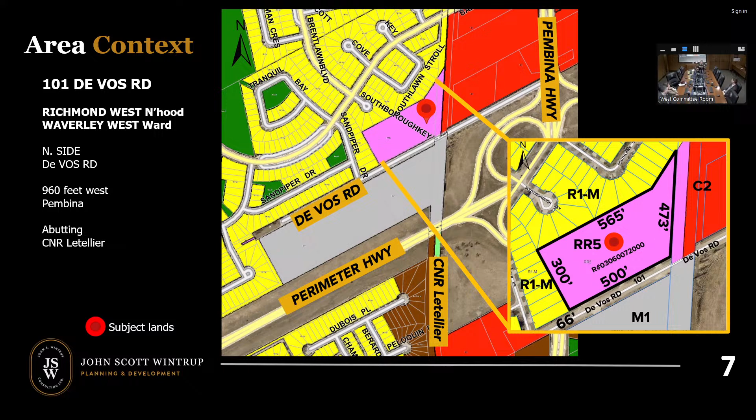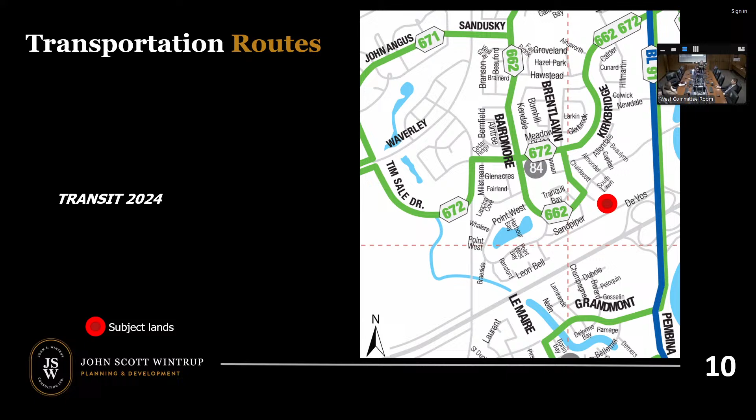Currently, DeVos is a 66-foot wide P3 rural standard with ditch drainage. It's a dead end at the west end, with a turnaround there. There's no other connections to any other residential roads or streets. So it's essentially a long cul-de-sac.

To the west of us are residential properties with R1 zoning. They have no access to DeVos Road across that ditch there. All their houses back onto this road.

Currently, 101 DeVos Road is a two-story structure. There were some hopper containers recently removed off the site for preparing for the upcoming redevelopment of the property. As I mentioned, it's RR5, but it's being changed tentatively to the industrial zoning district. It's a 4.2 acre site bounded by DeVos on the south, residential dwellings to the west and to the north, and the CN Letellier line to the east of us.

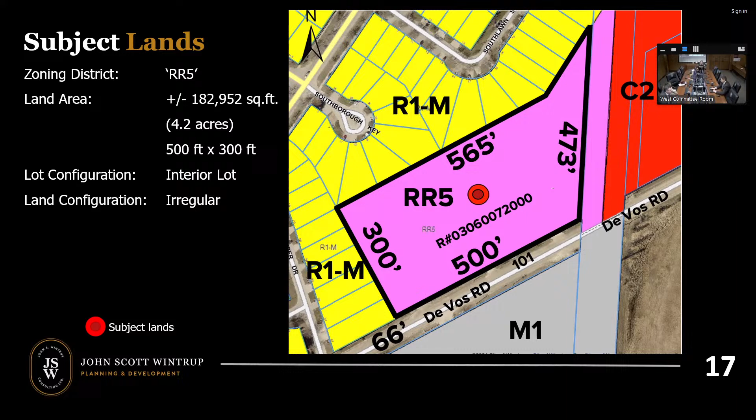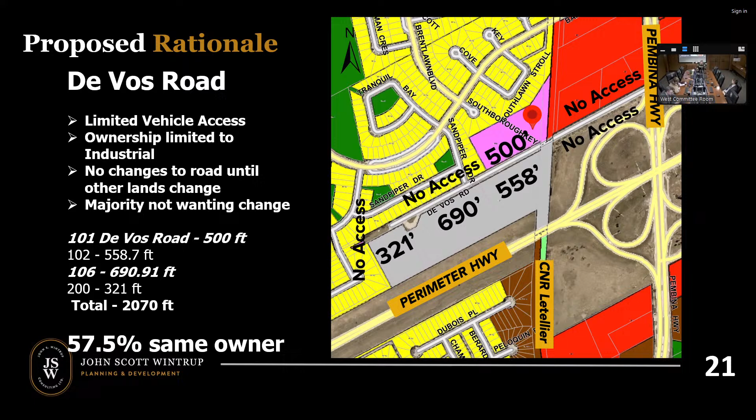I've been out to the site a number of times, as you can imagine. I've been down in St. Norbert quite a lot lately—not so much in the last week, but I've been down there quite a lot, and I would check out on this site because I had this upcoming project. I always saw nothing but commercial trucks, but that's my perspective looking at it. The guy in the gold truck actually stopped me and wanted to know why I was taking pictures of his truck. I talked my way out of that one.

All those industrial businesses along DeVos Road have been there for decades. I recall driving by there back in the 80s and 90s. Those industrial businesses have been there for quite some time, and they're well established—I don't believe any of them are looking to change. My client, who's intensifying on the north side, has been out there for quite some time as well, and controls, as I mentioned, about 57% of the frontage along DeVos Road.

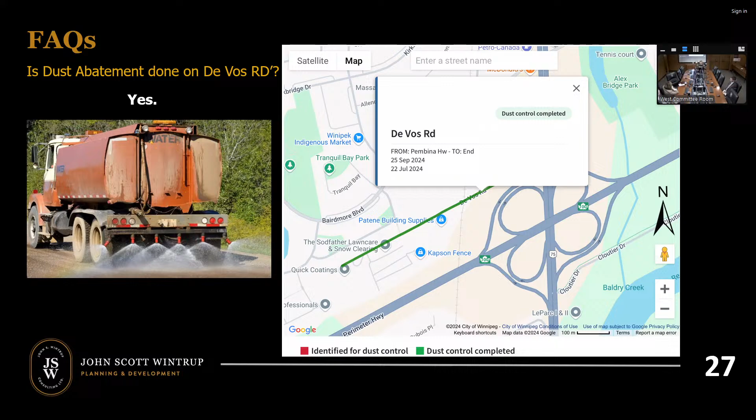Devos Road doesn't connect to any other roads. It's Pembina Highway - Sandpiper Drive stops there. It doesn't connect, and I don't even think too many people actually walk across there. There's a little bit of a pathway there, but there's really basically large commercial vehicles running up and down Devos Road during the daytime.

So I can't see too many people. I didn't see anybody walking around there. Again, I'm not out there 24/7, so maybe in the evenings or something like that, but it's pretty limited. So even putting in a sidewalk, I'm not sure where people are necessarily walking along Devos Road to get to and from Pembina Highway.

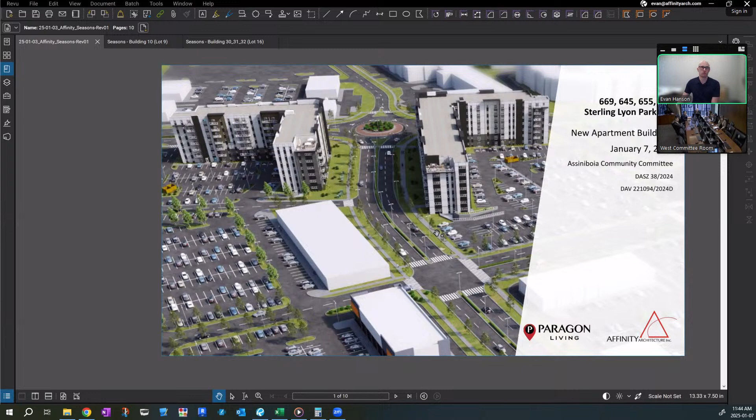I'll take a moment to share my screen. On this title sheet, you'll see an image that's a bird's eye view of the two buildings proposed as part of this subdivision rezoning process. On the right you'll see the building destined for Lot 2, and on the left the building destined for Lot 4. This bird's eye view looks towards the west.

Some subjects we'll cover today include the features of the buildings, such as the high quality non-combustible concrete construction, their use of sustainable construction materials, their high degree of energy efficiency, and the affordability of the units. There are affordable and market rate units offered within these buildings. Water and high-speed internet are included in the rents, and the suites feature contemporary luxury finishes and quartz countertops. There are also a variety of resident amenities we'll touch on briefly.

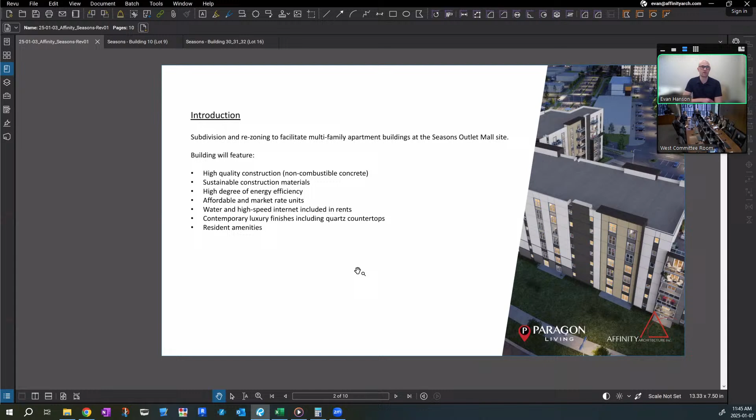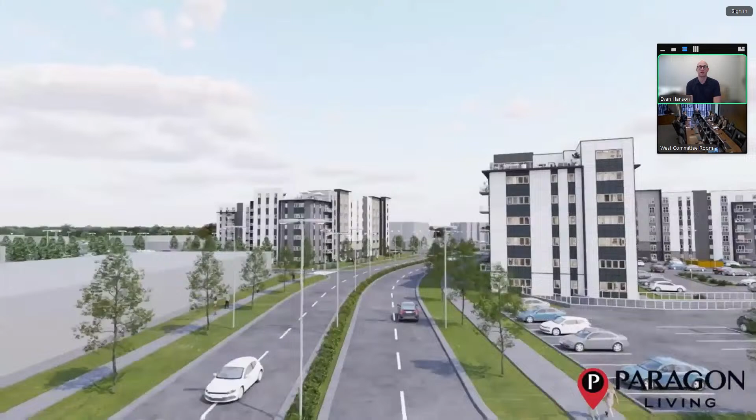Now we're moving west towards the new buildings. Lot 2 is on the right, lot 4 is on the left. We'll take a look at some of the design work on the buildings and pivot around, ending up facing east. Hopefully that gives you a good sense of how the buildings will integrate into the site.

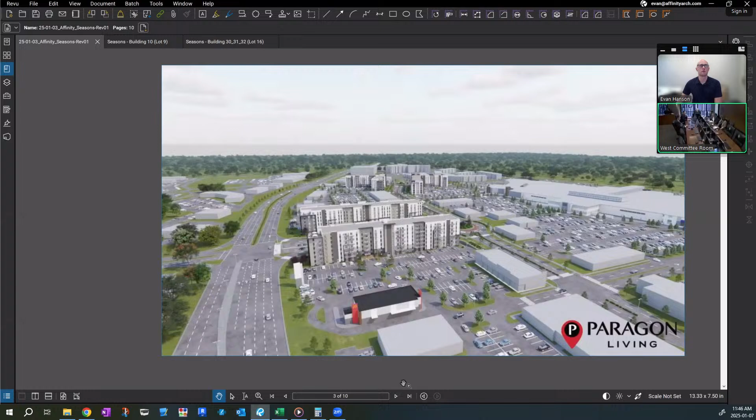Zooming in now, we're going to look at the site plan for lot 4. We worked with the public service to orient these buildings towards the sidewalks and pathways within the site in order to promote a more compact urban form. The parking is located underneath and behind the building, and the buildings are connected to the complex's pedestrian circulation strategy.

This slide shows the site plan for lot 2. The building is slightly bigger, but the same attributes apply in terms of its location close to the sidewalks and integration with the pedestrian connectivity.

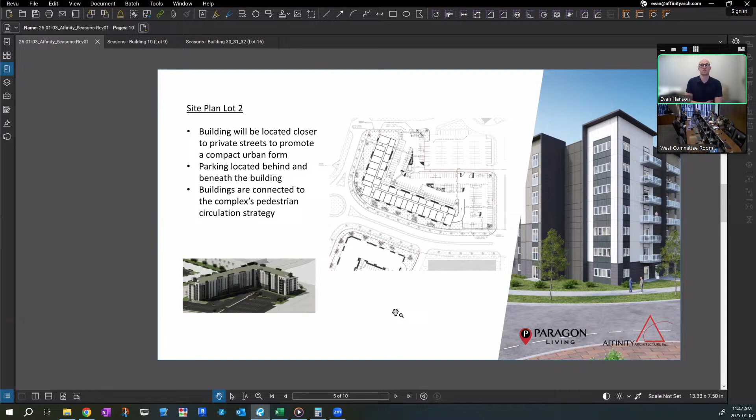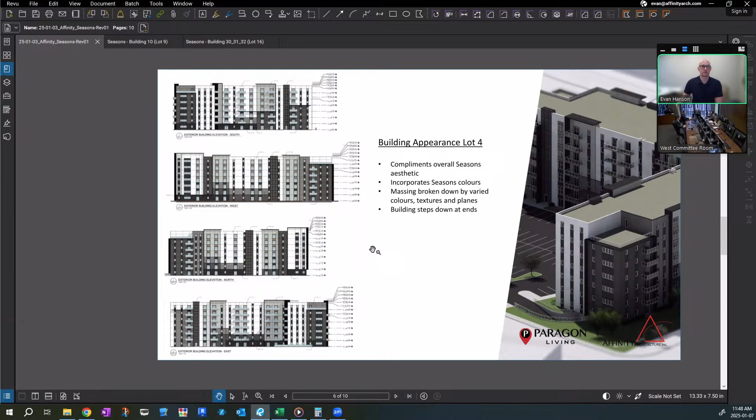This slide gives you a sense of the building's appearance. We have two-dimensional exterior elevations on the left and a perspective image on the right. We've designed these buildings to integrate with the overall Seasons aesthetic and complement it using similar colors, schemes, and architectural motifs. The massing has been broken down by a variety of colors, textures, and planes, and the buildings step down towards the end to create resident amenity patios on the roof.

The appearance of the building on lot 2 is similar. It's just a bigger building with the same attributes and the same step-downs for the resident patios.

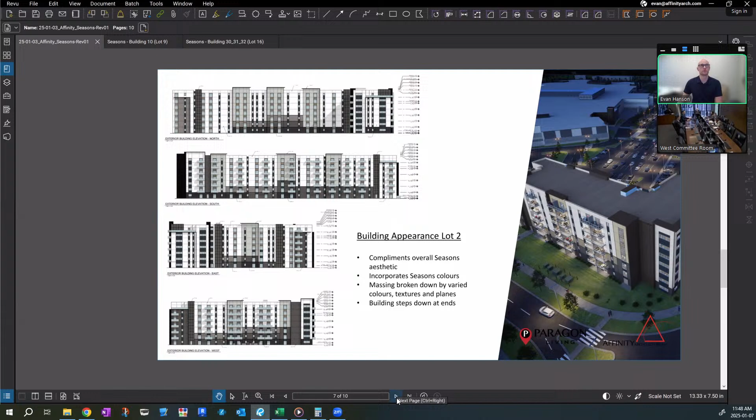As I mentioned earlier, the buildings are going to be designed to be highly energy efficient. They're going to be 25 to 30% more efficient than the applicable energy codes. And we'll achieve that through the use of triple pane windows, LED lighting, highly efficient HVAC and plumbing equipment, low flow fixtures, and the use of an ICF exterior wall, insulated concrete form.

This picture here, towards the right, is a picture of the ICF module that we'll use to form the exterior walls of the building. You can see it's insulated on both sides and it gets filled with concrete. So it's inherently energy efficient, but also the insulation we'll be using is made of BASF Neopor biomass balance insulation, which gives us an added bonus of a reduced carbon footprint.

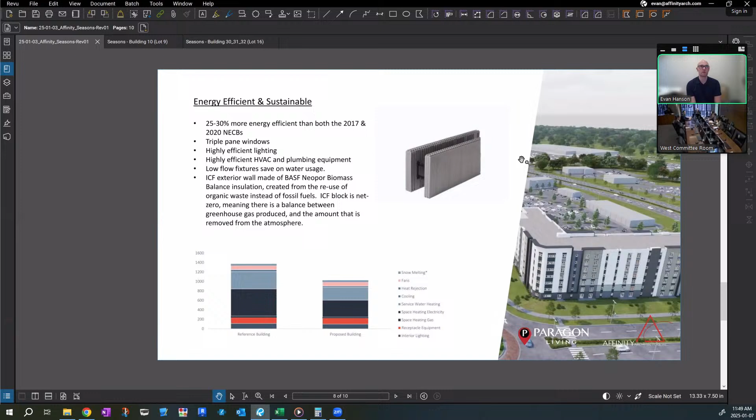The insulation itself is made with a combination of traditional insulation making methods, but also through the capture of recycled waste gas from other industrial products. So the carbon footprint is greatly reduced.

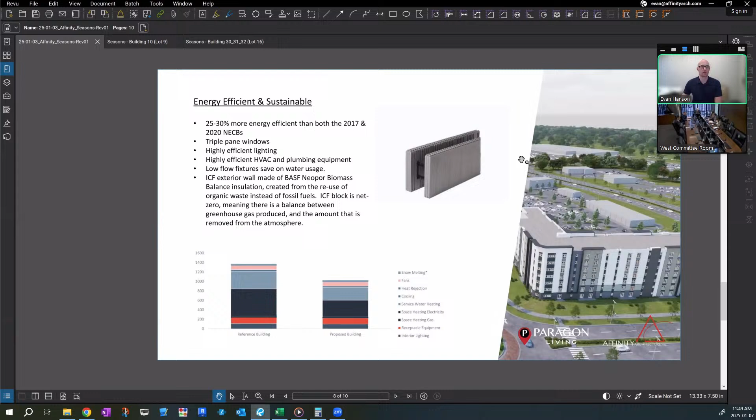The building is going to feature affordable units. 10% of all the units will be affordable, priced at 30% of the median renter income, and those rents will be in place for 10 years.

The units come with high-speed internet and water included in the rents. The suites are equipped with energy-efficient appliances to help keep the tenants' operating costs low. And there's going to be premium finishes within the suites, including Corian countertops.

The buildings are very accessible also within the common areas of the buildings, like the corridors and the amenity spaces and the multi-purpose rooms. They're fully barrier-free. And within the suites themselves, the suites are designed to universal design standards, which allows people with varying mobility issues to access all spaces within the suites and operate the kitchens and utilize the bathrooms.

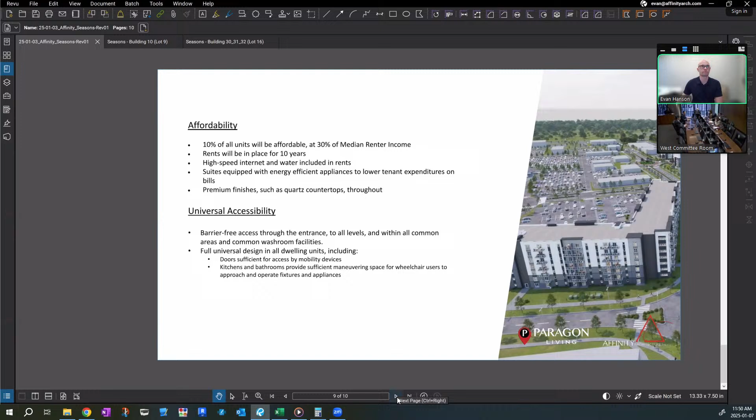That concludes my presentation. Thanks for the opportunity to share this with you today.

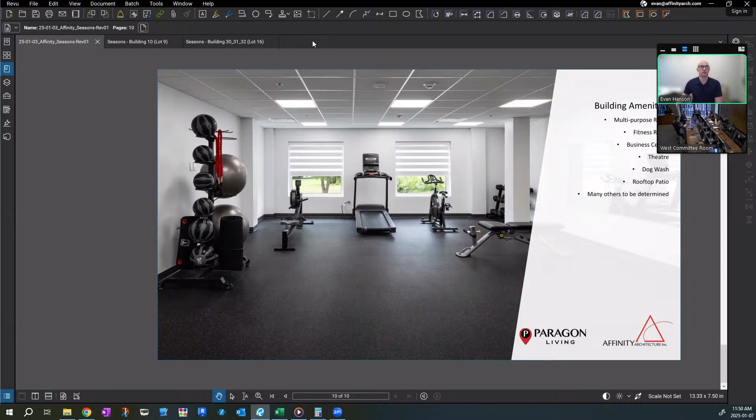Just a quick question in regards to the building proposed for lot 2. Does it stretch across to lot 3? No, it's contained within lot 2. I think lot 3 is intended to remain C4, and it's being subdivided off an existing parcel of land to make room for a future commercial building, I would assume. But Nathan and Blair would probably be the best to talk to you about that.

So lots 4 and 2 right now are where the placement will be, and they won't pass those setbacks there. Okay.

No, I mean, it looks great, and definitely a development that you can live, work, and play at. I'm not sure what the occupancy rate is at the Seasons Tuxedo. Well, not part of the Seasons Tuxedo, but the northwest corner is. But it looks like it's busy and full. So we definitely have need for more housing there, and this is looking like we're accomplishing that by thinking outside of the box to make these mixed use zones. So appreciate the presentation. Thank you.